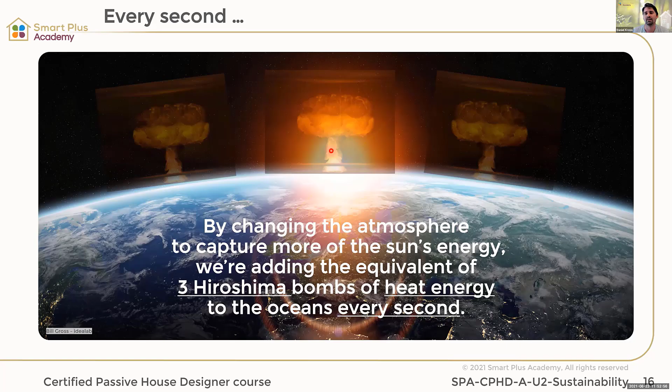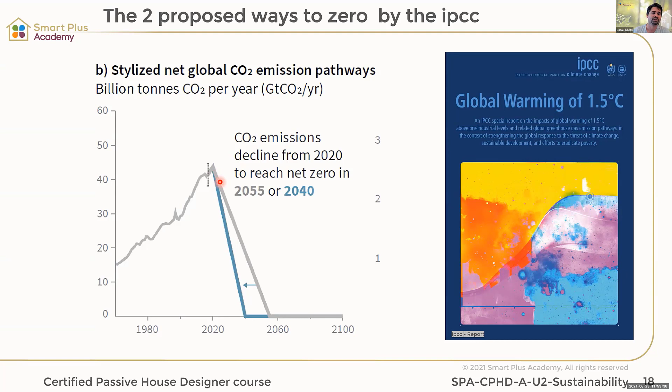In other words, we are now in 2021 and we haven't really started to go down. COVID in a way helped a little bit, but I think the drop was only 7% or something like that. So it's not massive. So yeah, this is what we're talking about.

Then the good news is, when we look at the global level, energy consumption of coal, oil, and gas is rising linearly since 2000. So it's a linear rise, not exponential. The renewable energy sources are growing exponentially. So why? Because they're economical.

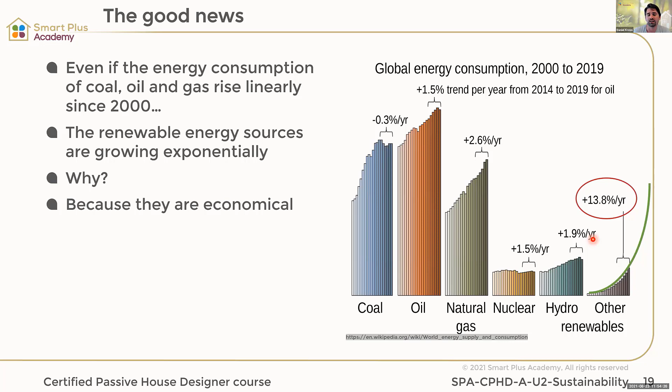Renewable energy is economical. It's not that coal, oil, and natural gas are cheaper. They are just more developed at the moment. They're economical, and you see we're having this growth of 13.8% a year, and this is really creating exponential growth. So we can expect that renewable energy will be more and more available, faster, because it is economical.

When we look at a kilowatt hour of energy, diesel is 10 cents, coal is 6 cents, combined gas is 5, wind is 3, solar is 2. So just looking at these cost values of energy, why are we not using renewable energy for everything?

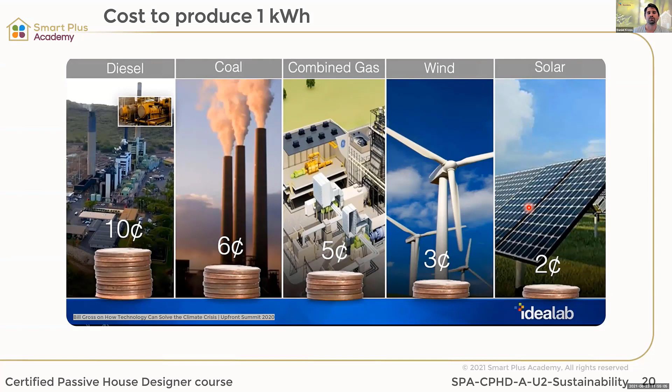They have one little disadvantage. Wind, solar, and renewable energies in general are not always available when they are needed. So we need to look at storage. There are 3 ways of storing energy. We can store energy chemically, thermally, or mechanically.

Chemically, that's our battery. We're all used to seeing batteries, car batteries, lithium, cadmium, all these different battery types. Or in solid form, like timber, oil, palm oil, gas, hydrogen, methane, biogas. All that stuff is chemical storage that we could have. Then we can have our thermal storage, in hot or cold storage.

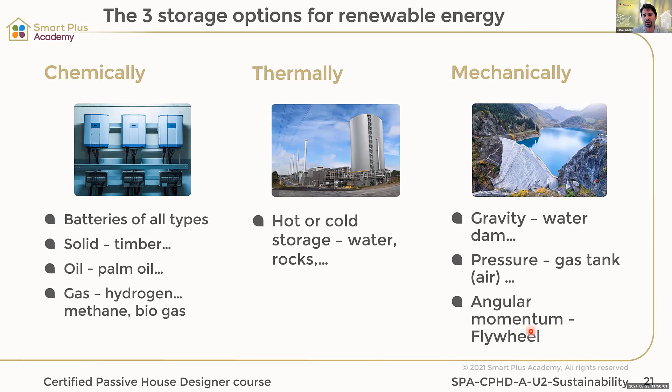So we are heating up water or heating up rocks or something, storing the energy in there, and then releasing it when we need it. So that's thermally. And then mechanically: gravity, water dam, pressure, gas tank, angular momentum, flywheel. So we have a flywheel that moves around.

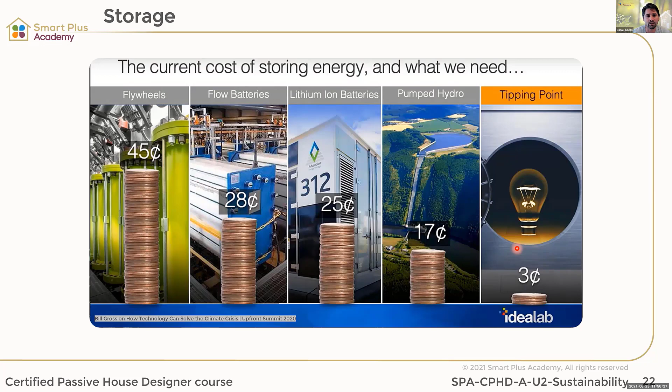Now looking a little bit at the cost of storage: flywheel is 45 cents, flow battery is 28 cents, lithium 25, pumped hydro 17. So the tipping point to be cheaper than the cheapest fossil fuel would be 3 cents per kilowatt hour. If you're able to store energy for 3 cents per kilowatt hour, then it's pretty much always cheaper than fossil fuel. Here is a storage solution that is able to achieve that.

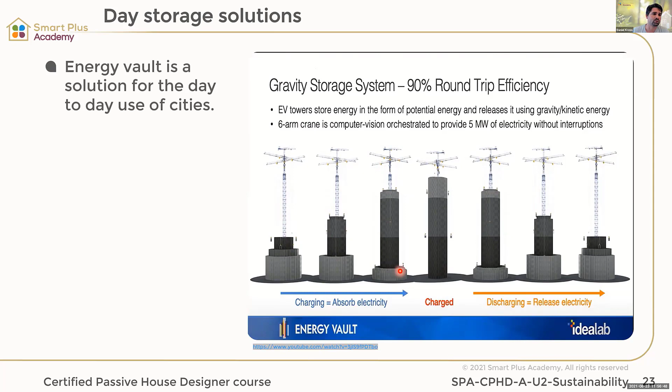Energy Vault is a solution for day-to-day use for cities. It can deliver 5 megawatts of electricity 24/7, as long as it is recharged in a 24-hour time frame. Most likely not economical for seasonal storage. This is now at 3.5 cents per kilowatt hour. The last news that I had, it might already be down at 3.

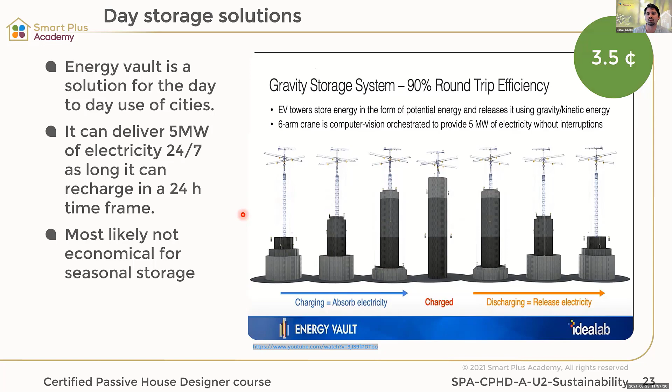And here they're recycling concrete. We just spoke about it earlier. So they're using recycled concrete for the blocks that they're lifting. So there are solutions for storage already available. However, we have the issue of short-term and long-term storage.

We have our mechanical short-term storage, like our Energy Vault with the cranes. And then we have our chemical storage, long-term seasonal storage, that's methane or hydrogen, and combining the hydrogen with carbon creates the methane. That's long-term storage.

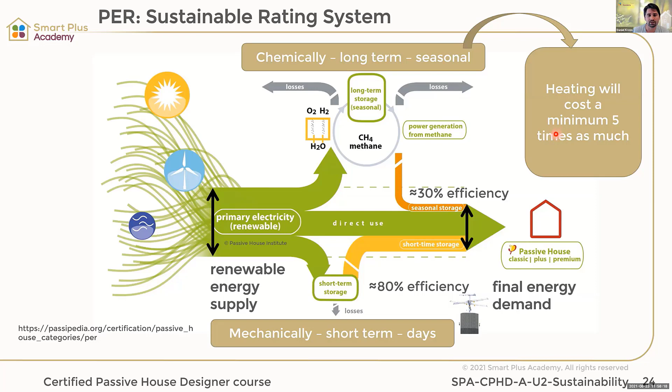Long-term storage is seasonal storage, and that means we have to store the energy for heating from the summer into the winter, because in the summer we have more energy available than in the winter. That means heating will cost us a minimum of 5 times more than cooling. This means even in a warmer climate like Sydney, we really need to look out for the heating period, and the cooling period is not so important, because that energy we get for 2 cents instead of at least 10 cents.